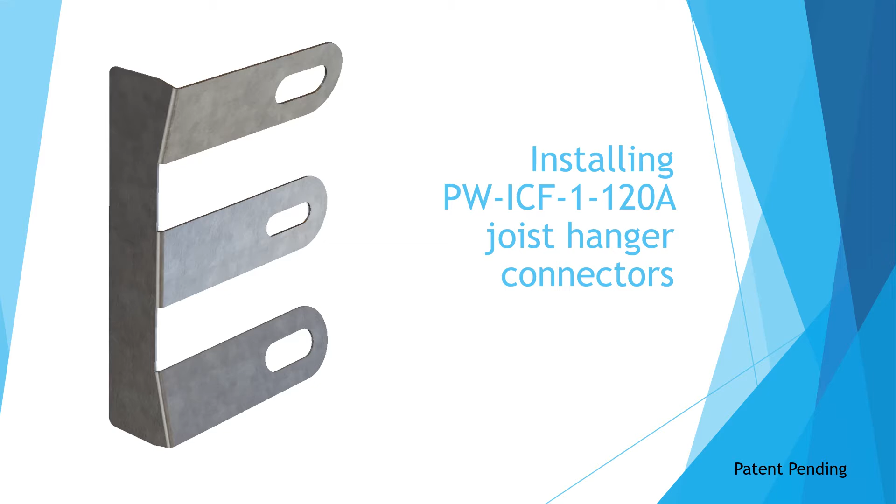Installing PW ICF connectors. The PW ICF connector is a galvanized metal insert that's embedded into an ICF concrete wall to receive the floor joist hangers.

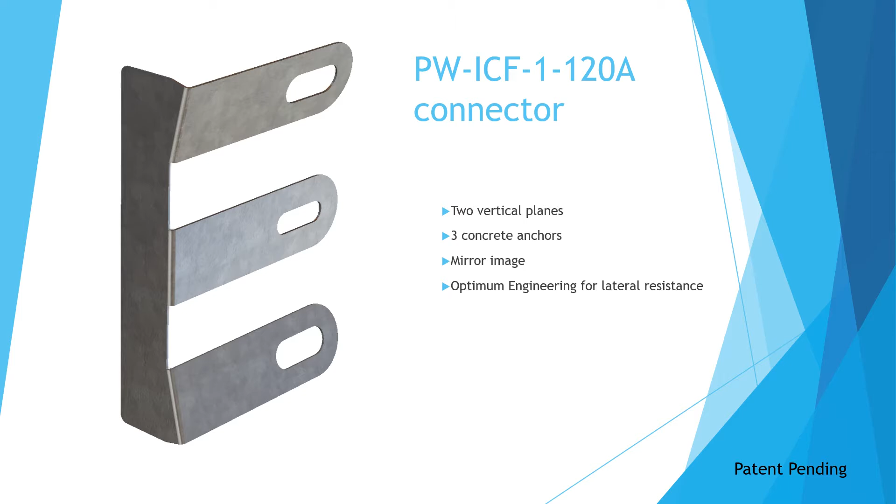It has two vertical planes to provide guidance when laying out the PW connectors. The vertical planes are here and here.

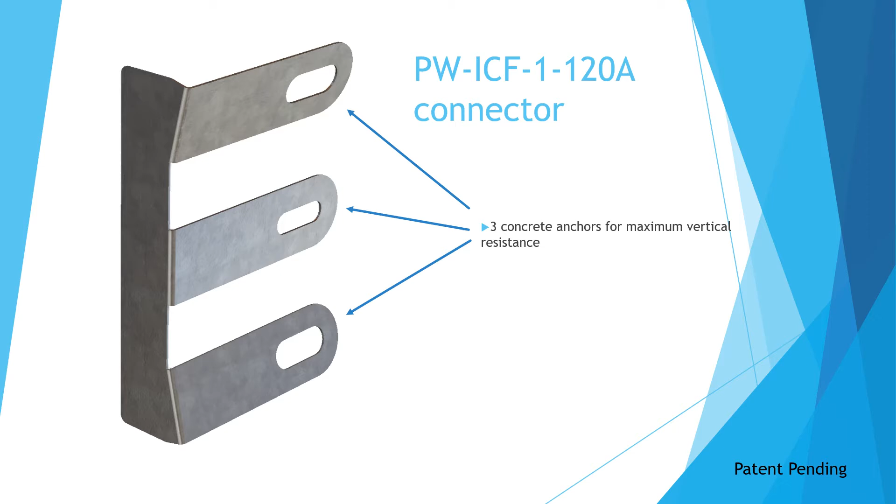The three anchors get embedded into the concrete and provide maximum vertical resistance. And the mirror image design allows you to flip the product one way or the other, making it much easier for you to lay it out.

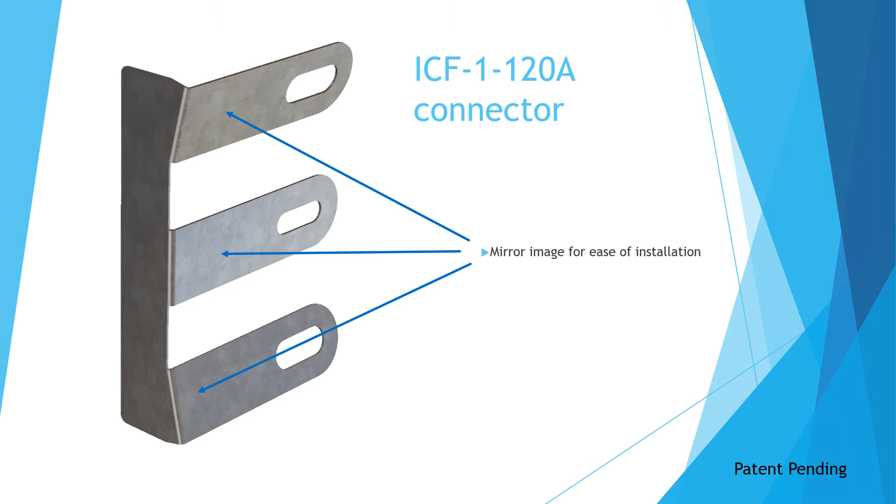The angled bends provide lateral resistance. It's like trying to open a door with bent hinges.

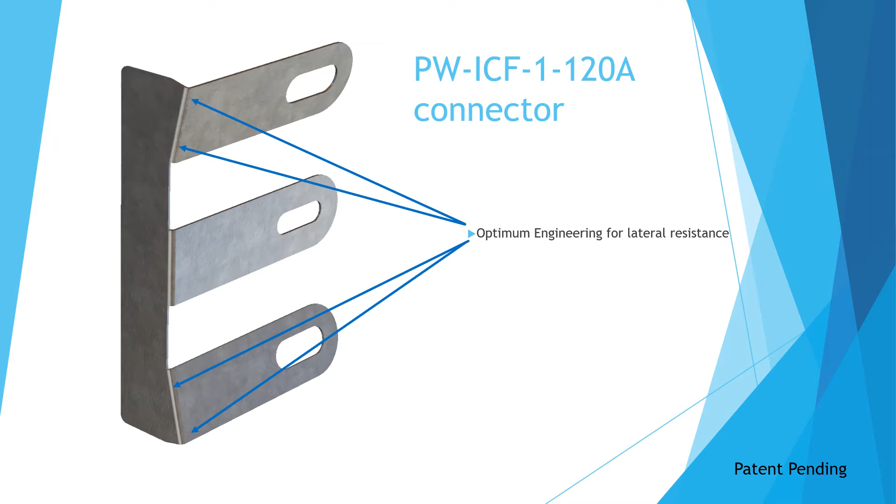One box of PW-ICF connectors has 20 pieces, that's 10 sets, enough for 10 joist ends. You have 10 number 10, 3/4 inch screws with a hex head, self-tapping. There's an install guide, and each box weighs about 35 pounds.

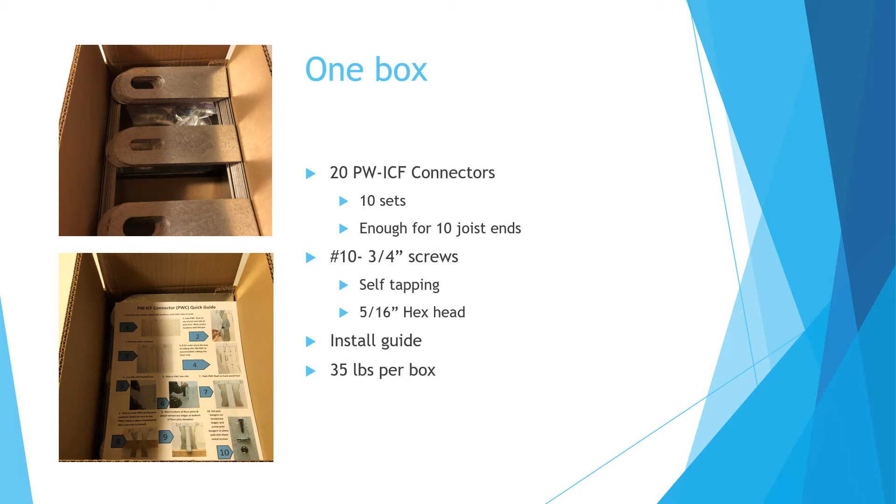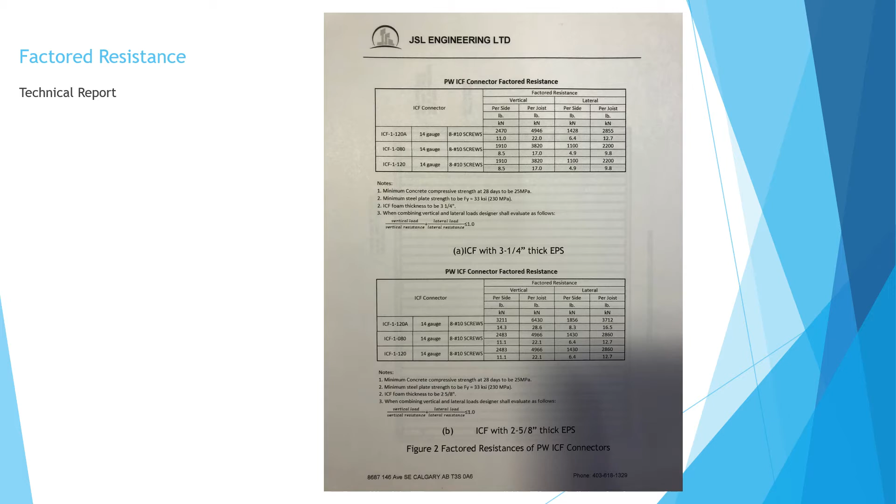The technical report is third-party certified by professional engineers, and it has your factored resistance or loads for your wall, as well as a layout for your parallel wall bracing. The ICF wall needs to support the diaphragm, or the diaphragm needs to support that parallel ICF wall. It's laid out so it works with your plywood subfloor material.

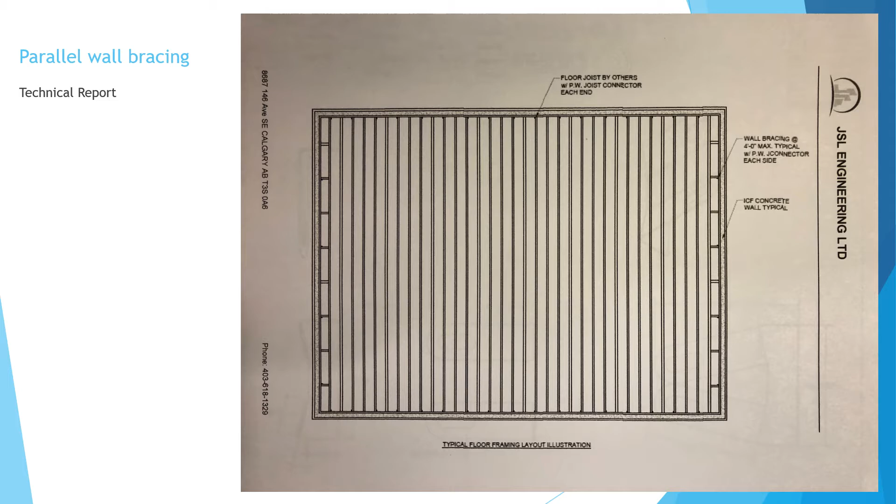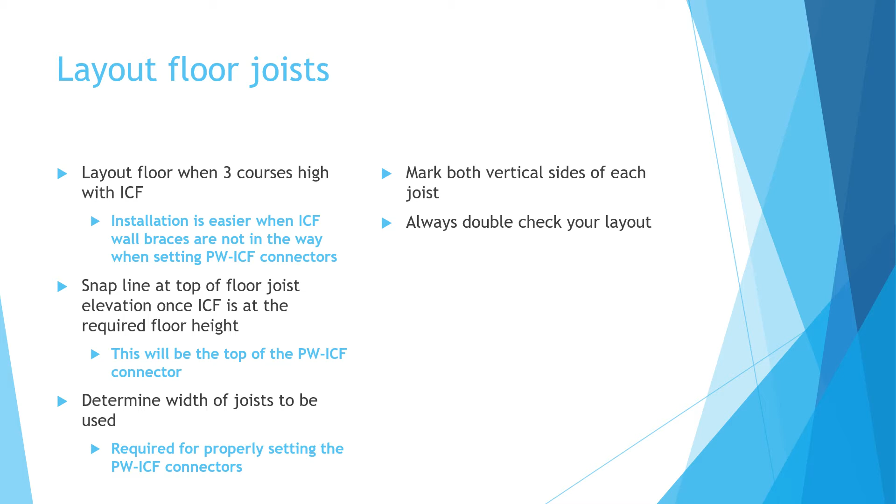It's pretty easy to use. You lay out your floor, you snap your line, typically top of floor line. You mark out each vertical side of your joist so you can decide which way to flip the connector, and always double check your layout.

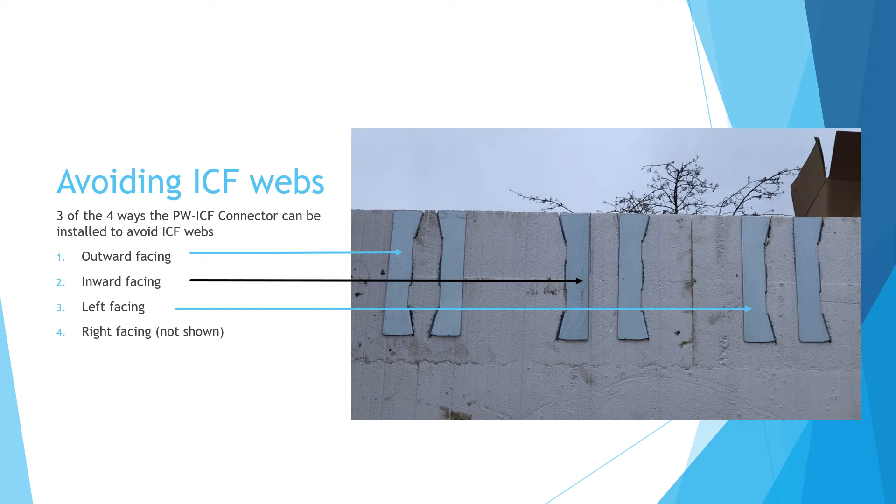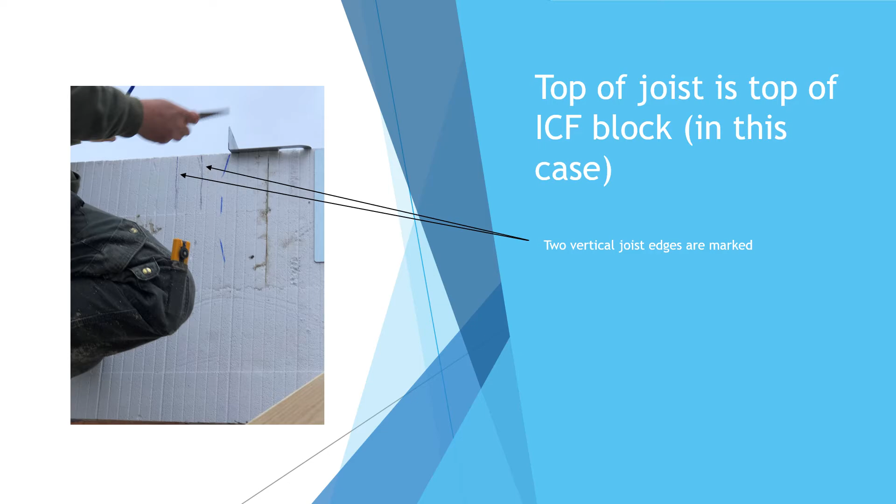So typically, snap your line, mark out your joists, a vertical line on each side. Pretty straightforward.

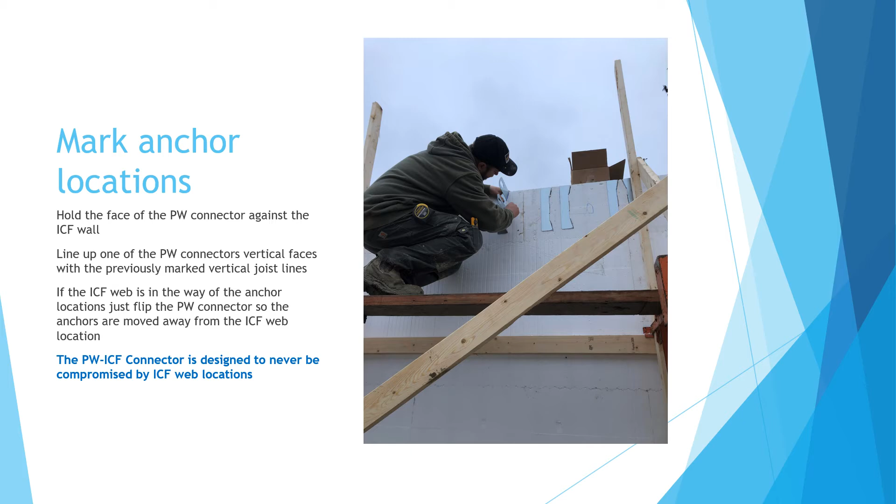And then you have to mark out your anchor locations. Once your vertical joist lines are marked out, you can determine which way to flip the PW-ICF connector to avoid cutting into an ICF web.

It's pretty straightforward. You just take the ICF connector, hold it up in the reverse way against the ICF, and then you can mark where the anchors go with a felt pen. You can see he's marked each side here, to avoid having the anchors try to get through the web. So he's reversed them so they're just in the foam, and they're all marked out.

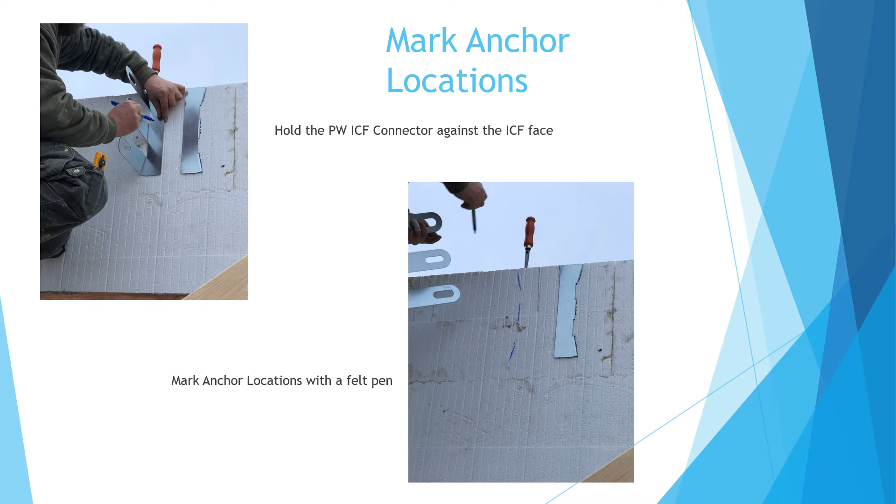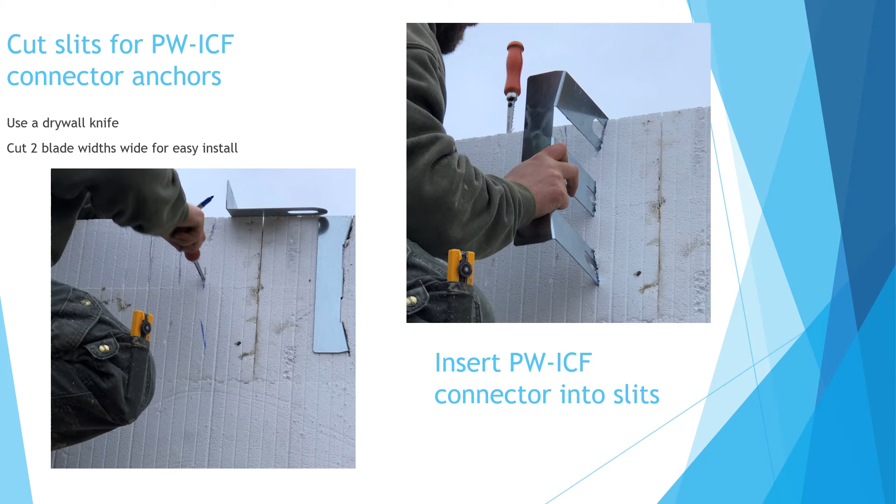Then you push your ICF connector flush into the wall so it's tight to the ICF.

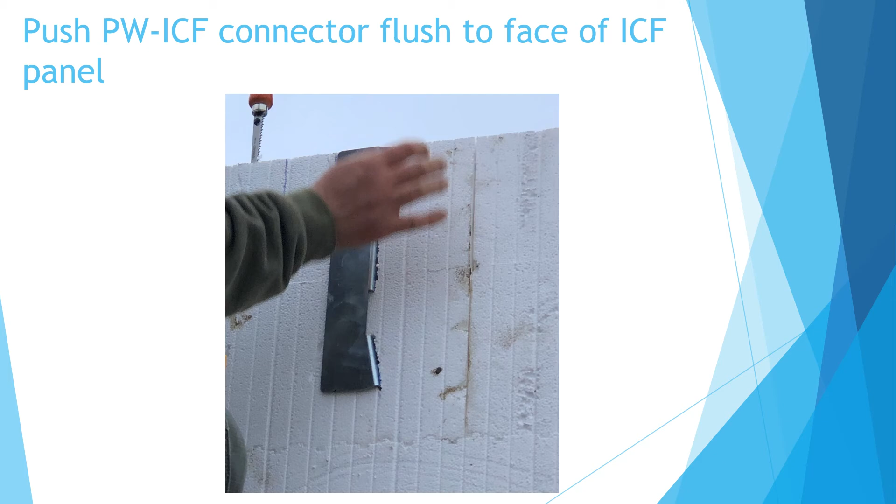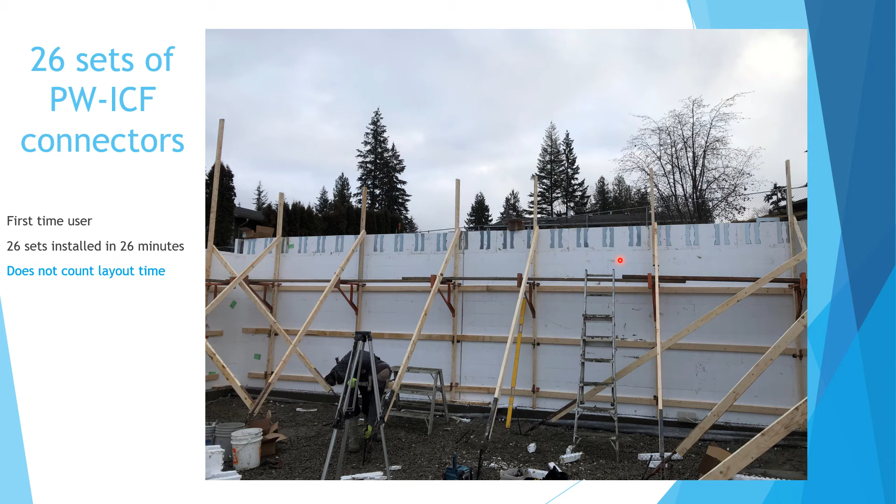This particular project, they never used the product before. They put in 26 sets in 26 minutes, basically 1 minute per set, and that did not include their layout time. You could add a tiny bit for the layout, but laying out the floor is pretty straightforward and reasonably quick. As you can see, all 26 sets are put in, and you can tell they're flipped various ways to avoid cutting the ICF web.

I typically screw a little cleat over the top so it keeps the PW connector in place, keeping it from migrating away from the wall. Always check after the pour, make sure they're tight, and you can just tap them back in with a hammer if they've come out a bit. But if you put a cleat across, you won't have any issues. That's typical to all ICF joist hangers you're going to work with in the ICF world.

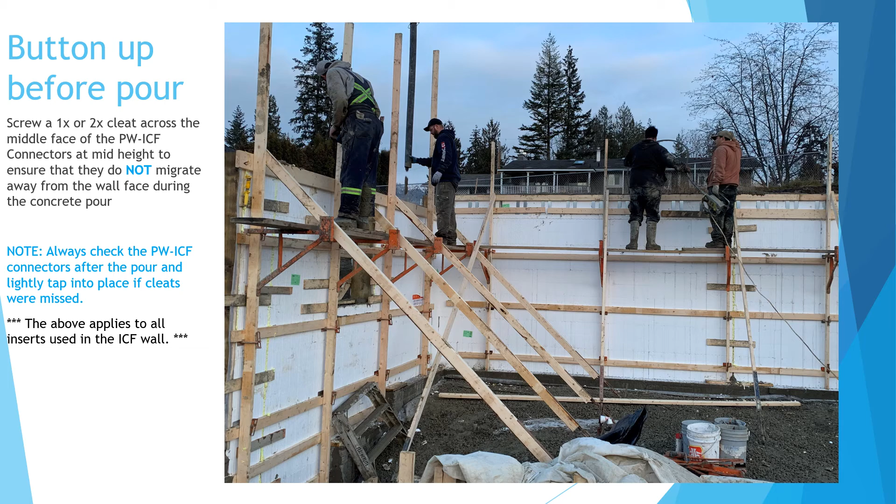Then once you strip your bracing off, you can fasten your joist hangers too. So when you fasten your joist hangers, typically again, now you snap bottom of your floor. The reason you re-snap a line is all ICFs settle when you fill them up with concrete.

So there's a huge compressive load that goes onto an ICF. Whether the ICF webs touch each other or not, it's still going to compress down that wall. It has everything to do with rate of pour, weight of concrete, friction on the sides. But that will pull your wall down no matter what.

It's 5,000 pounds per cubic meter or thereabouts, so it's a pretty heavy product, and it does pull your ICF. It compresses it down so it changes your wall heights. So with this system, now you snap your line and everything's good.

I usually screw a 2x4 or something about 6 foot long with a couple screws in it just to hold that line. Then I set my joist hangers on top of that and screw it in so all my joist hangers are at the proper elevation. I just move along my 6 foot 2x as I go and screw in all my joist hangers.

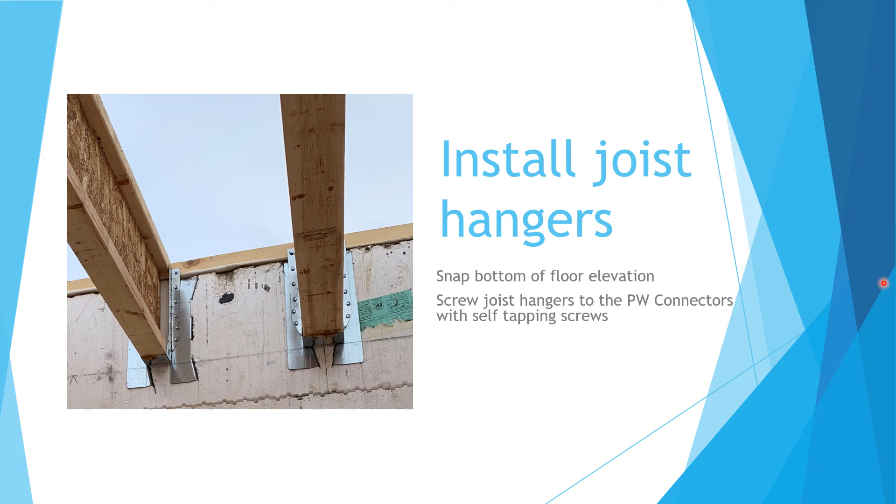And all that's left to do is drop in your floor joists and nail or screw them into place. Some may or may not need squash blocks, but that's as easy as it gets.

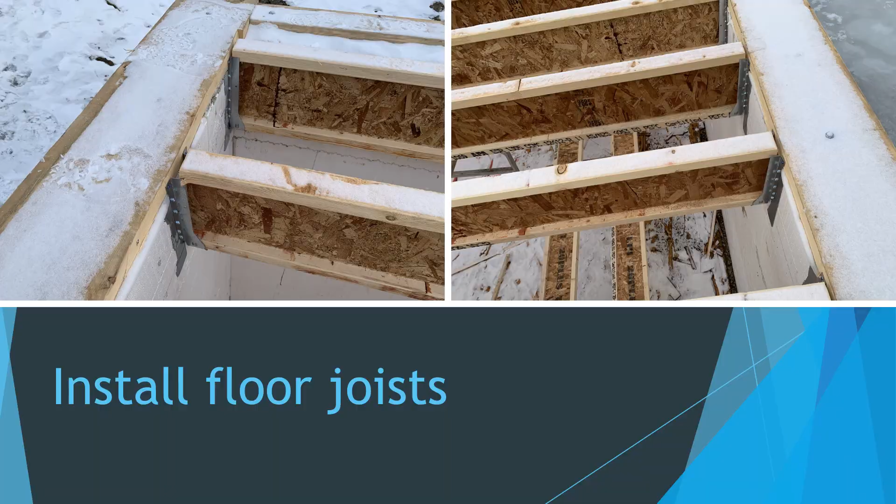They're easy to install. They're always at the proper elevation because you compensate for that compression of the ICF wall. It's almost as fast as nailing them in. The screws with the hex heads go very fast into the connector.

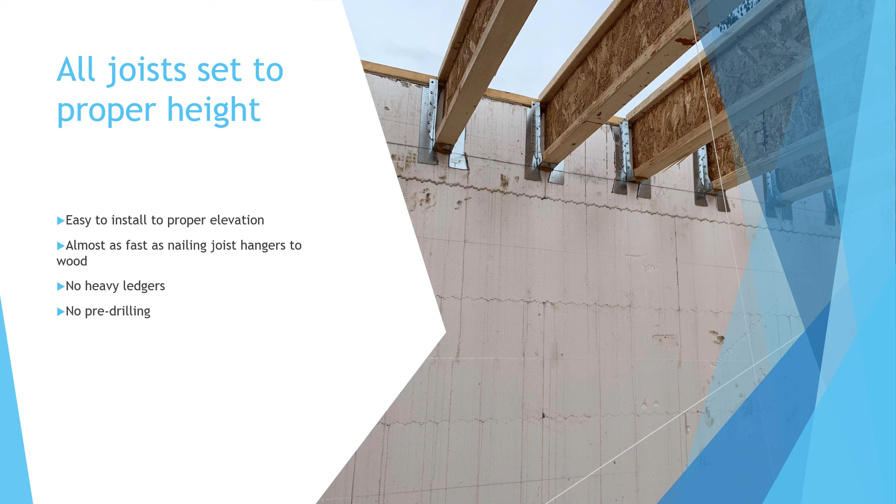There's no heavy ledgers to lift. There's no pre-drilling on the ledgers and over the connectors. You don't have to shim everything or anything because everything is set to that string line you've set at the bottom of floor elevation.

Electrical and plumbing, your sub-trades can run up through between the joists. There's no ledger in their way. Very convenient for building ICF walls, or for your sub-trades following behind, so they can move from floor to floor without the ledger being in the way.

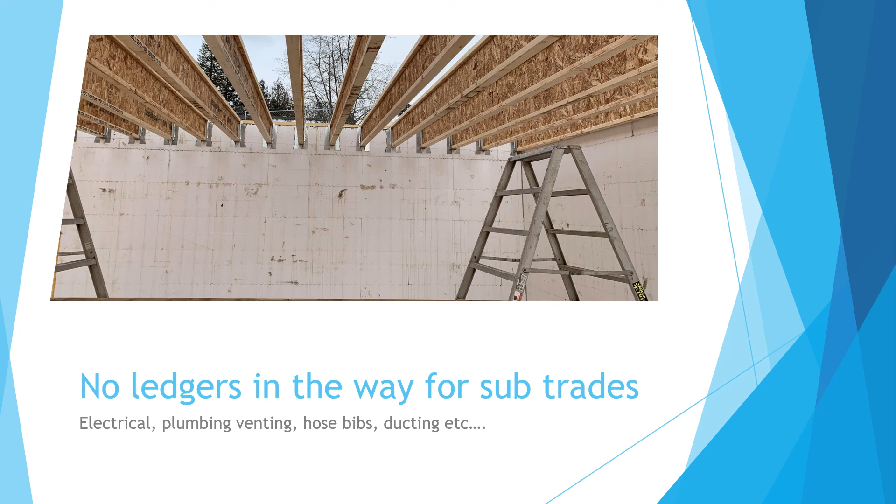Really, it's a simple, elegant product, easy to use, easy to lay out, very fast to install. I'd recommend giving them a try.

I've been installing ICFs since late 80s, early 90s. I've been in the business a long time, 30 plus years installing ICFs, and this is one of the better products I've worked with. So if you have any questions, go to the website and or give us a call. Thank you.